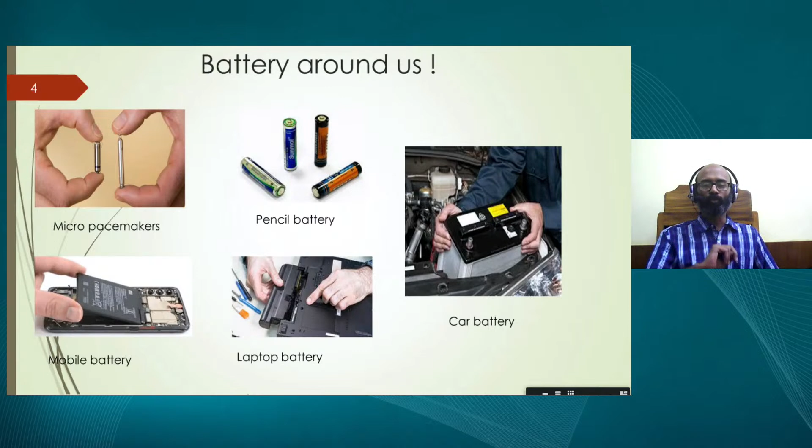So looking at these things, we can categorize batteries into two types: the primary battery and the secondary battery. The primary batteries are the ones which you use and then discard—lithium batteries, alkaline batteries, and zinc or carbon-zinc batteries are available.

Here, the user will charge it once, and then use it, and once it's over, you just throw it away. Whereas when you go to secondary batteries, there you charge multiple times—you charge it, discharge it, charge it, discharge it—you can do it multiple times.

But is the concept different for any of these batteries? No, the concept is always going to be the same. The chemical energy gets converted to electrical energy, and then you use the electrical energy and throw it away in the case of a primary battery. In the case of a secondary battery, you have a chemistry such that you can charge it again, converting electricity to chemical energy, and then use that chemical energy for your purpose later as a discharge mechanism. So chemical energy and electrical energy—you are essentially playing with the battery chemistry. This is the concept of batteries.

I have written here redox. Since you are in class 9 and 10, you must already have started looking at what is oxidation and what is reduction—so those reactions are possible. A battery works on the principle of redox.

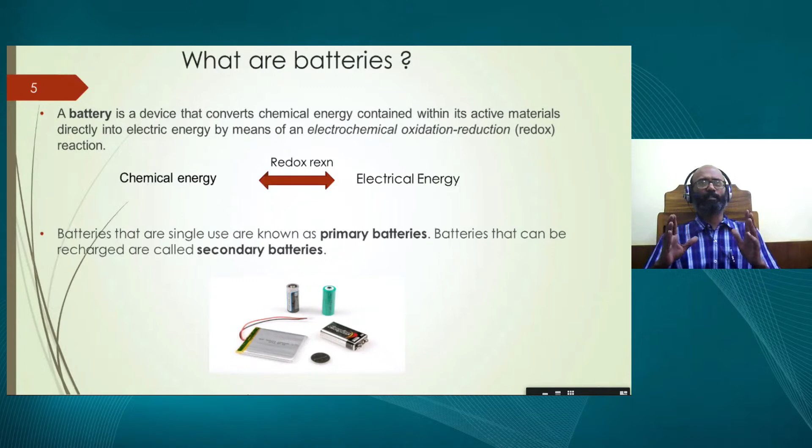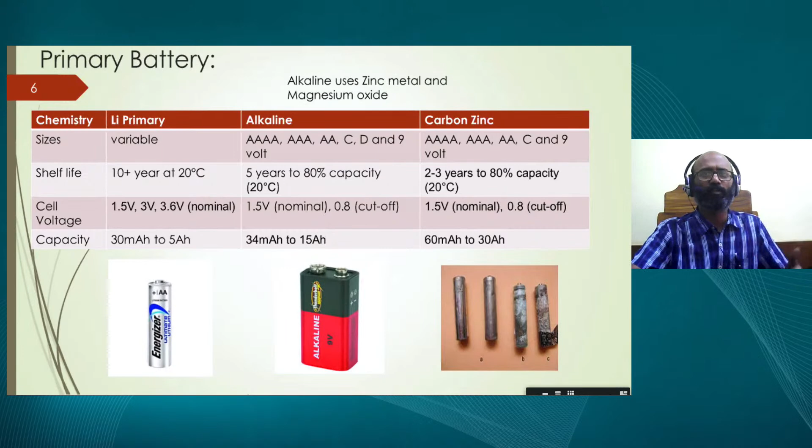Okay, so now I go for the secondary batteries. In the case of primary batteries, one of the important things to know is that the shelf life is relatively large, but the capacities are very low. They are not very high capacity batteries, so if you want an application, you need to put many of them together to use it. That's not very viable, so it is not good for many applications. So what you need to go for is the second type.

So the shelf life is not very much. As soon as you buy batteries, you have to put it there. At the same time, the life of the batteries is more, which means that shelf life and the normal life is different, because you can charge and discharge. How many times can you charge and discharge? You can discharge at least 3,000 times. This is the lithium-ion battery.

You have lead-acid batteries which are very much available in India. As you can see, some of your UPS and all those things are running based on that. Your car batteries are also lead-acid today. And the technology which is already in the market includes lithium-ion and polymer batteries, and lithium iron phosphate-based batteries. These batteries are already present.

There is something called 18650, I have written here. What it means is that this is the size of the battery, basically. A size like that, 18650, is the size of the battery, that's what we talk about. The prismatic batteries and other batteries look like that. You can see that, that's the kind of batteries.

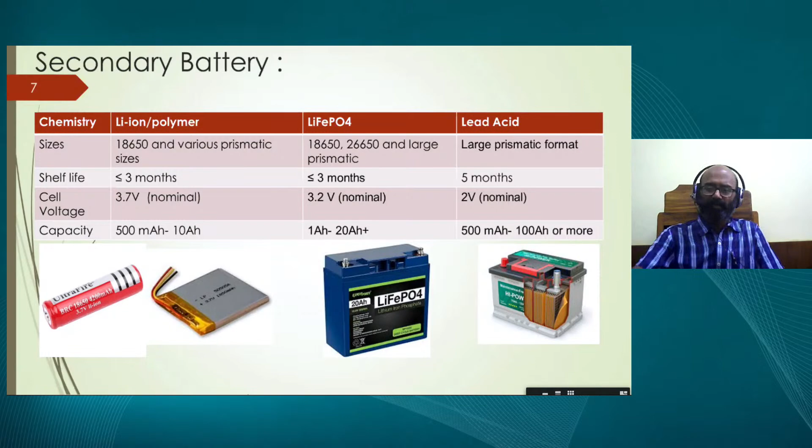So the prismatic battery, or then there is one more battery which is also possible, which looks like a prismatic battery. It is a pouch cell, we call it a pouch battery. And these are the three kinds of batteries which are in the market.

Let us see how to read these batteries. This is the first thing you need to know before we understand about the batteries. The first thing we always look for is, what is the capacity of the battery? Who decides the capacity? The capacity of the battery should be high, then I can use it now. So who decides the capacity? It is the chemistry which decides. Basically, it's the cathode which is there, that decides the capacity of the battery. If it is low, it is low; if high, it is high. So it is your best choice to choose the capacity of the battery.

But you can read it in terms of milliampere hour or what, that's up to you, it depends on the thing. Do you want to read it as a power, as the energy which you want? And the second thing is the maximum voltage. The maximum voltage is again decided by the cathode and the anode. So your chemistry is again going to decide the cathode, and the way you choose is going to decide your capacity.

And I'm putting it here, one of the Samsung and the Apple batteries. These are the places where they are given, you can read them. Before you buy batteries, you have to look at it. So higher the voltage, yes, it's good, higher the voltage is good. And the nominal voltage means the average charging time, the voltage that it's going to see. So that is about 3.85 for a 4.2 volt or 4.4 volt battery of lithium. So Samsung lithium battery is something which I'm trying to show you.

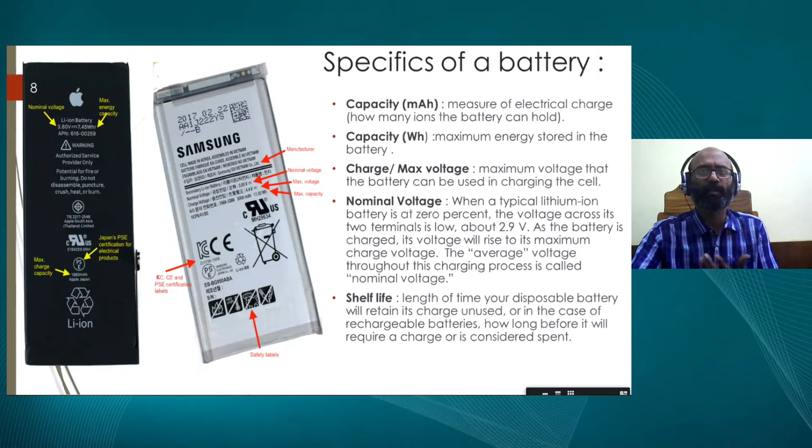There's something more also, there is something called SOC, they call it the state of charge. So state of charge, when you go to a market, this is particularly important for the EVs. When you go for the EVs, this is important. I'll come to that point a little bit later, maybe, that's better. When I show EVs, I'll come to that.

Okay, this is how you read the batteries. Now I'll show you the analogy of the battery, the charging and the discharging.

What is it? Let us assume that you have a reservoir of water, which I'm showing on the left-hand side. There is an upper reservoir and a lower reservoir, and I'm opening the reservoir, and it is going to come down, and there is going to be a turbine which is going to rotate and generate the power. So that is discharging. I'm discharging the battery now, and then I'm taking the power and utilizing it. Okay, now water comes to the lower reservoir. So what I'm saying is, upper reservoir is the higher potential, lower reservoir is the lower potential. So now going from upper to lower potential, I have taken the charge. What is my charge? Here it is like water. I have taken my charge.

So I have drained the battery. Now I have to charge it. How do I charge it? I'm going to put a pump and put the water back into the reservoir. Okay, so this is the process of charge and discharge.

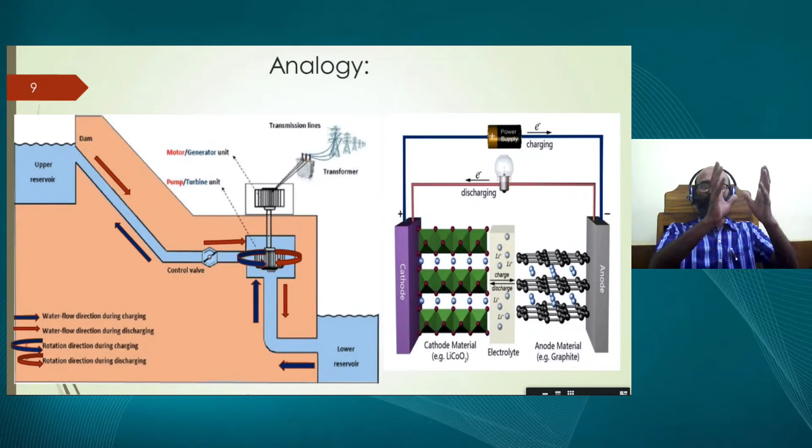That's exactly what you see on your right side. The cathode has got lots and lots of lithium reservoirs. So this lithium, I'm going to put a source, and I'm going to take it out and put it on the anode side. What is it I have at the anode? Possibly graphite, which is very cheap. So I'm going to put it over the graphite, and now I'm going to remove the connection.

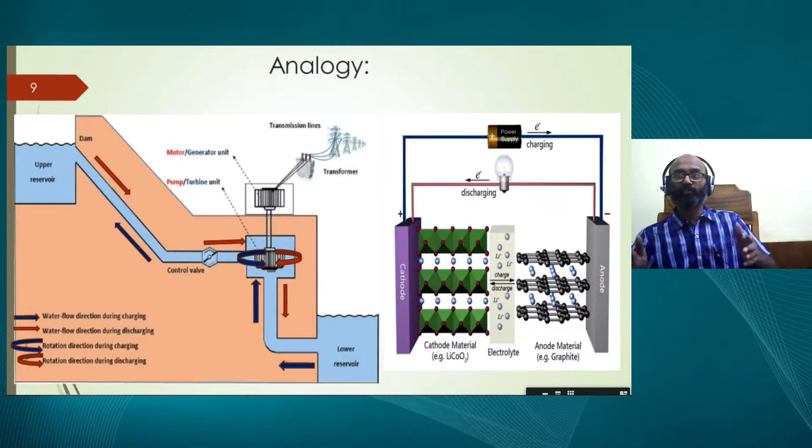Now charging is over. Now I'm going to discharge it. I'm going to plug into my application, and then it goes from anode to cathode. When it goes from anode to cathode, I'm using it, which means that now it is completely charged. Charge means I have higher potential. I put the charge there. Now I can discharge. So this is the very fundamental, and this is most important.

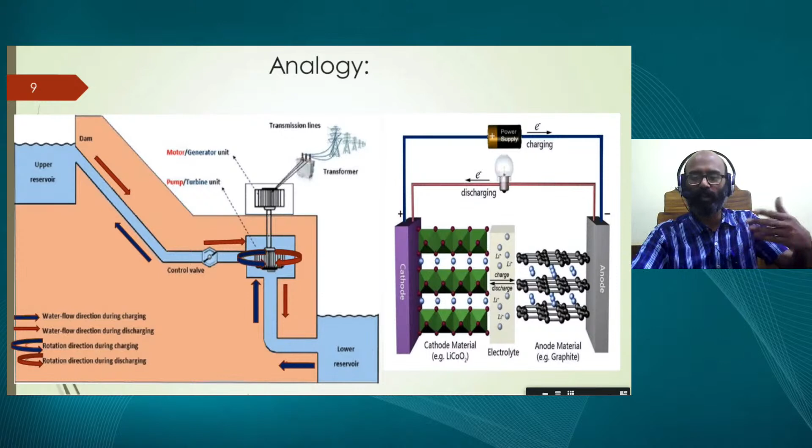Okay, so now, then all batteries should be same? No, no, no, all batteries cannot be same. What matters is the path.

So I have charged up to 5 volts and I am coming to 0 volts. Now the way it is coming down, as you can see in your Daniel cell, which you must have studied in your classes, where you have zinc anode and copper cathode, and you have something called a salt bridge. That is the path. If you don't have the salt bridge, then you cannot transport the ions. So the transport of ions is extremely important.

What ions are we talking about? If it's a lithium battery, I am talking about the lithium. If it is a zinc battery, I am talking about the zinc. If you look at the primary batteries, the lithium primary batteries and the zinc primary batteries, the same way, the principle is same. If it is a secondary battery, then 5 volts, the way it goes, it has to come back.

So your road should be as open as possible. You should not have too much of crowd there. So which means that as I have drawn the resistance here, your internal resistance of the battery should be as minimum as possible. Okay, this is extremely important.

So the whole of battery engineering, your cathode and anode will not change, my boys and girls. What changes is your road. How beautifully you put your road is what is going to decide your battery. This is where the technology is going to come in. Technology 1, technology 2, technology 3, which I am going to show you. This is where the research is.

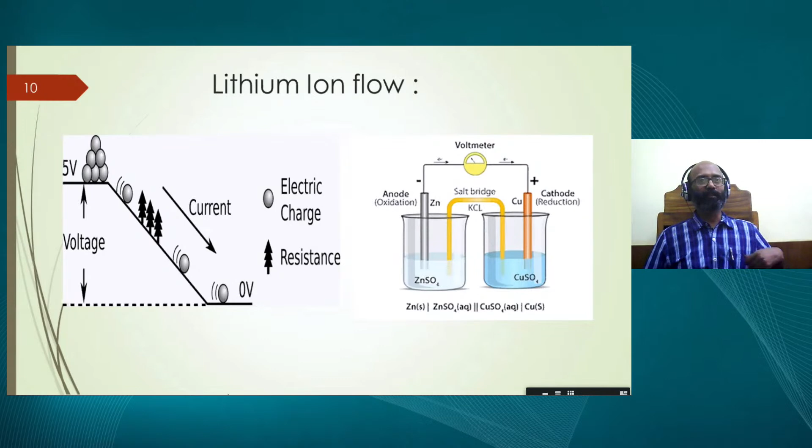We people, like in IITs, we work on these things. Of course, I can also work on new cathodes and new anodes. That's one part. But when I have so many anodes and so many cathodes, let me pick one of each. Now let me work on this road, the ion transport road, very well, and I can use it. So for that, you need to know what are the components of the battery very clearly.

Now I'll put it down like that - cathode, anode, and separator are there. Now I'm going to put it like that, and pour the liquid. What is the liquid? This is the electrolyte liquid. Then I'm going to seal it. Now your battery is ready.

Without that liquid, the transport is not easy, because in liquids, the electrolyte resistance is very low, and that's the reason we need it. I hope you understand this part. These are the very fundamentals of the battery. These first few slides are all about the very fundamentals of the battery.

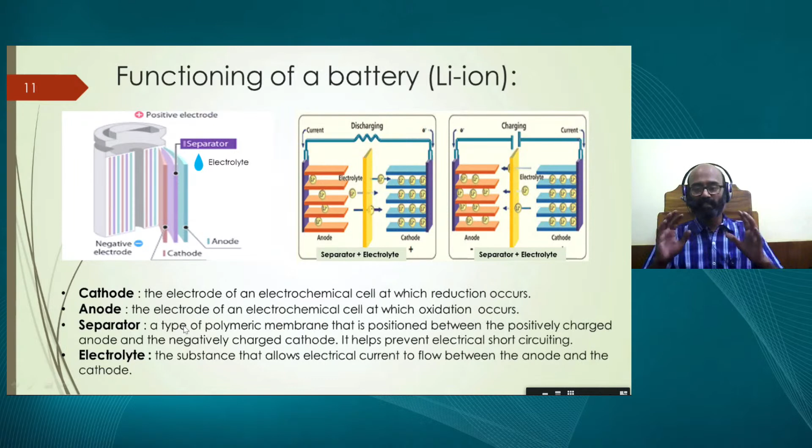So cathode and anode together decide your total voltage of the battery, and the separator and electrolyte together decide how quickly or slowly you can charge or discharge - fast charging, fast discharging - and second, the internal resistance of the battery and the life of the battery is going to be decided by these things. This is a very fundamental part of that.

Let us look at one of the chemistries - the lithium-ion battery, lead acid battery. The chemistry looks more or less the same. You have the redox reaction happening, and what is happening at the cathode is that you are going to take the lithium out from the cobalt oxide. So lithium cobalt oxide, you are going to remove it, and then put it there.

You are going to apply a potential, and then at the anode, you have already put the lithiums in carbon, like it sits as LiC6, and when you discharge it, that lithium is going to go and reach the cathode side. This is the chemistry, both in the case of lead acid battery or the lithium-ion battery, it's the same thing.

In the lead acid battery, it is lead metal versus lead oxide as the positive electrode, which we tend to use. In the case of lithium battery, it is lithium cobalt oxide, and the carbon is what we cycle between. So this chemistry remains more or less the same.

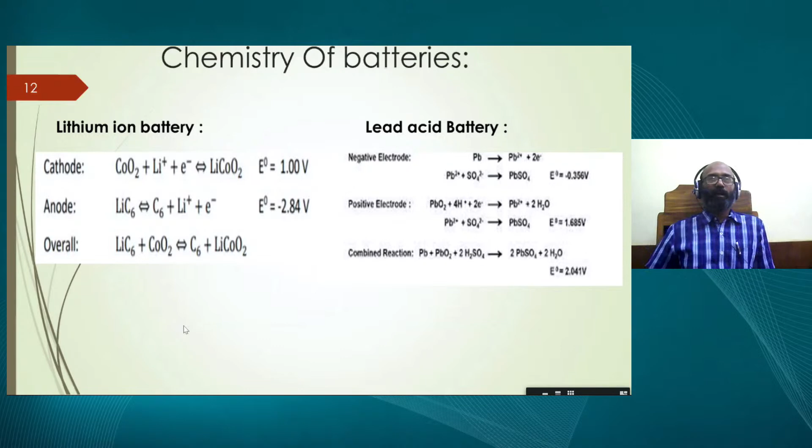However, as you can see, the voltages are different. These voltages are the electrochemical potentials, and I am going to show you this. If you open your NCERT books, you have a big table which I am going to show you somewhere down - you already have this in your class textbook.

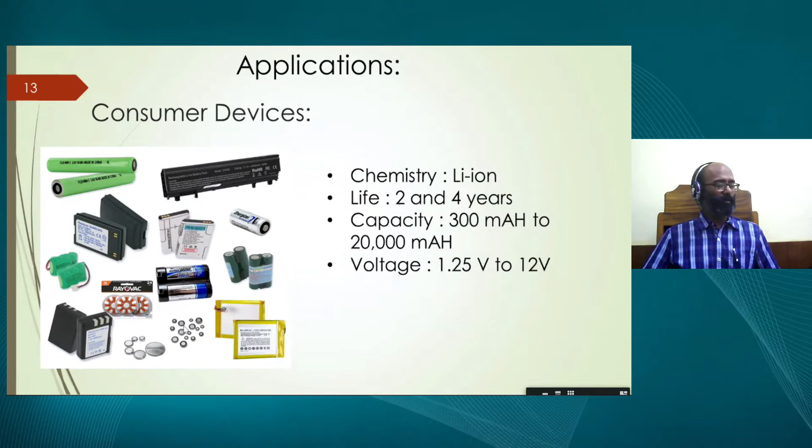So now look at the applications - what are the various possible applications? You have consumer devices like lithium batteries for laptops or remote controllers, or for stationary applications, and particularly very small applications like your watches. For all these purposes, these batteries require about 2 to 4 years, which is good enough, and the capacity is about 300 milliampere hour to 20,000 milliampere hour. These are the kind of batteries people look for in consumer devices. The voltage ranges from 1.25 to 12 volts - for lead acid batteries, 12 volts is very common, people look for 12 volt batteries.

Next application is the grid. What is this grid application? Grid basically means you have a thermal station, and you have huge power at the grid. So what happens is you are actually trying to draw power from the grid, as there is a lot of power there, and you're going to draw from it.

So now what is happening is that many batteries are put up, so as not to pressurize the grid, because there is a peak hour and non-peak hour. In peak hour, the power you draw is more, and in normal times it will not be much, so you have to have a balance. In order to protect all these things, we need to have batteries - when we are not using it, you charge the batteries, and when you're using it, the batteries are ready to give you the power.

This is another very important application which is going to be very large, and sodium sulfur batteries have been using it. Now people are thinking of using lithium ions too. Here you are not talking about 1 or 2 years. Once you fix it, you go for 15 years, and the capacity is not like milliampere hour, it is in megawatt, gigawatt. It's a huge capacity.

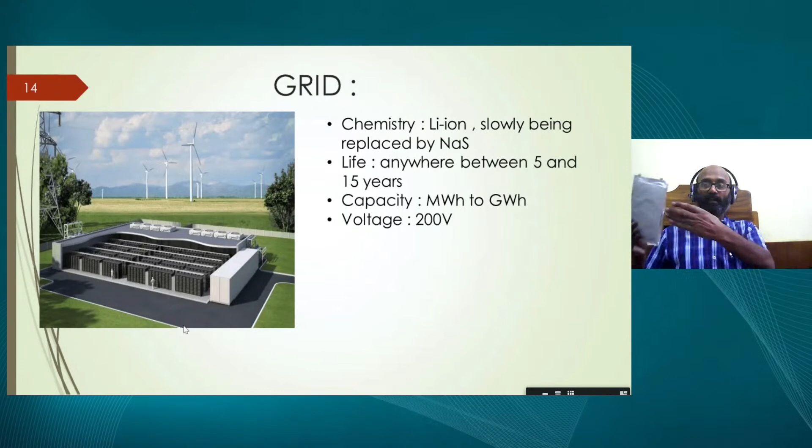The battery remains the same, it will be the same battery like this, but I'm going to put many of them. So it will be a very large area where we are going to put these batteries. And the voltage also, you see the 200 volts. Even a single battery, not this size, rather of this thick size, you'll be able to make.

Next application is going to be UPS. UPS is, you see your PCs require UPS, and many of your some very sensitive applications which you do, you better have a backup. So for that you use the UPS, and here you go up to 48 volts, and the battery life will not be very large, but the capacities of the order of 6,000 ampere hour can be used. But for these batteries, you don't need very high-fi ones.

Even 50% DOD, this is the depth of discharge, can also be used. And the state of charge and depth of discharge I am going to explain to you.

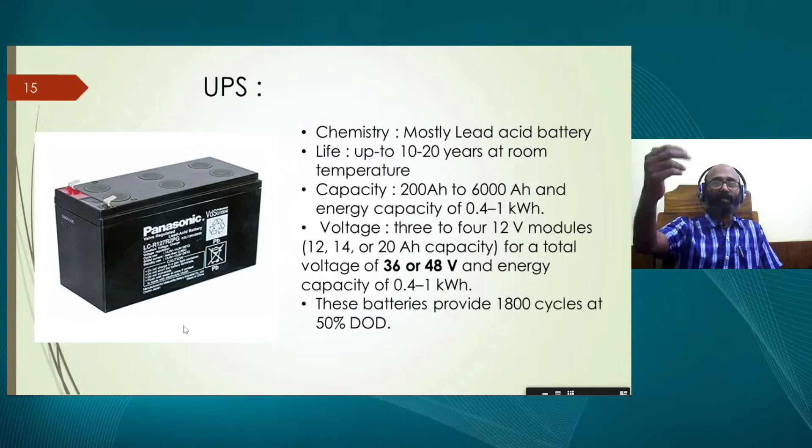The other application is going to be your electric vehicle applications. In electric applications, definitely you can still use your lead acid batteries, but with some modifications. But still, the capacity of those batteries is going to be very low. That's the reason energy density of lithium-ion batteries today, nobody can beat them. So lithium-ion and lithium polymer batteries are the best batteries available in the market today. People go to China and get them, and they make it and sell it. That's what is happening today.

So the capacities, if you look at it for electric batteries, what you have is 40 to 100 kilowatt hour is the kind of batteries required for that. Even 150 is possible, but it depends on the kind of car you use. And the voltages used are about 100 to 200 volts.

At the same time, your DOD is different here. The state of charge is basically the charge which you have after whatever the life of the battery is, the charge which is there for you to utilize, which is kind of like surge, you can say. The energy available for you to utilize. But you look at it, for the electric vehicle, we are putting it at 80%, whereas for the UPS, we are putting only 50%, because for electric vehicles, the energy hunger is very large. That's the reason you need to have a lot of energy for this one.

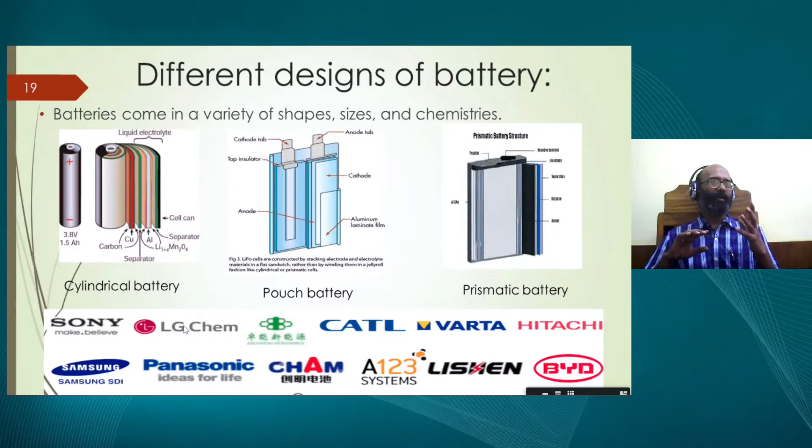Now let me tell you about different designs of batteries, because designs of batteries are also very important. For a car battery, you generally do not go for cylindrical batteries. Of course, Tesla in one of their models is going for cylindrical batteries because they are small, easy to manufacture and easy to put in. There are some advantages involved in that.

But generally, we go for the prismatic batteries or the pouch batteries. The prismatic and the pouch look like this. The only thing is the way you wind these batteries is going to be different. In the case of a pouch cell, you do a Z stacking, like that you put it. Whereas in the case of prismatic batteries, you wind it - very simple winding you do. Whereas the 18650 batteries, they look like that, as I'll show.

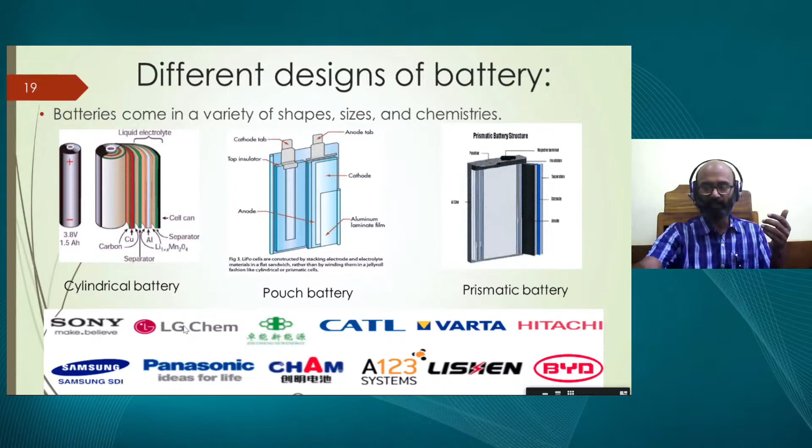So you can look at the number of companies which are making these. You can see that all these companies are from outside India - none of the Indian companies are actually manufacturing batteries. I am going to come to that point a little later. So you look at the Indian battery manufacturers - most of them are lead acid batteries, and then zinc carbon batteries, and nickel cadmium batteries. Most of them are primary batteries, and a few of them are secondary batteries. Nickel cadmium - some of them are secondary batteries being manufactured in India. But lithium-ion batteries are not yet being manufactured.

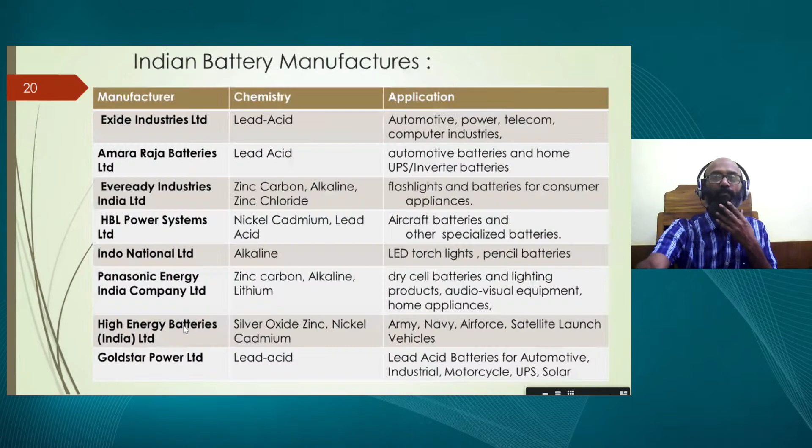Next, look at the cell. Why? Now the question comes: why? What is the problem? Why can't we just do it? When we can do it with other batteries, why can't we do it for lithium? Look at the problems - here I'm going to explain the troubles involved in the process.

Let us look at the cell fabrication - manufacturing of this cell I'm talking about has three components. Component one: you should have your cathode and your anode, and that cathode and anode need to be prepared, coated in the form of a film. Then you should take it to the formation of the cell, and then you have to go for testing. There are three parts you have to finish, and then the batteries which are very good will go off. If they're not good, they'll come back, and again you need to relook into the design part. So this is the three key components: cathode and anode preparation, formation, and testing.

In cathode and anode preparation itself, there are about 5 to 6 steps involved. And again, the formation - like the stacking, packing, and filling the electrolyte - that is another 5 steps. Similarly, testing is another 5 to 10 steps. So all put together, there will be so many steps involved. For example, if you look at the lead acid battery, the steps are more or less the same.

Like pure lead you take it, and the lead oxide you take it, and grid casting you do it, and you need to paste them, and plate stacking you do it, and you can cut it. The cutting is done to the size required for the application. Then formation, where you actually put it. So this is the way you go: formation, cutting, plate stacking, group welding, connector welding, acid filling, and then charging and discharging is done. So this is the kind of scenario for lead acid batteries.

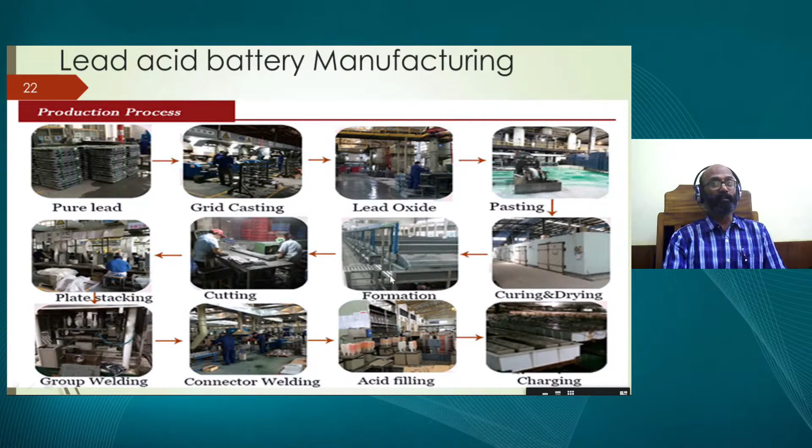But however, if you go for lithium-ion batteries, you see the complication is going to go up. I'm going to show you. It involves about 16 to 22 steps or even more.

So you have the mixing. First, you need to take it and mix the powders very well, and then you need to coat the powders, and then calendering. Calendering means you need to press them, and then you need to slit them, groove them, dry them, fill them, and weld them. Then diffusion, crimping, tester, sorter, and everything. Most of the things have to be done in the glove box. That's another very, very important thing.

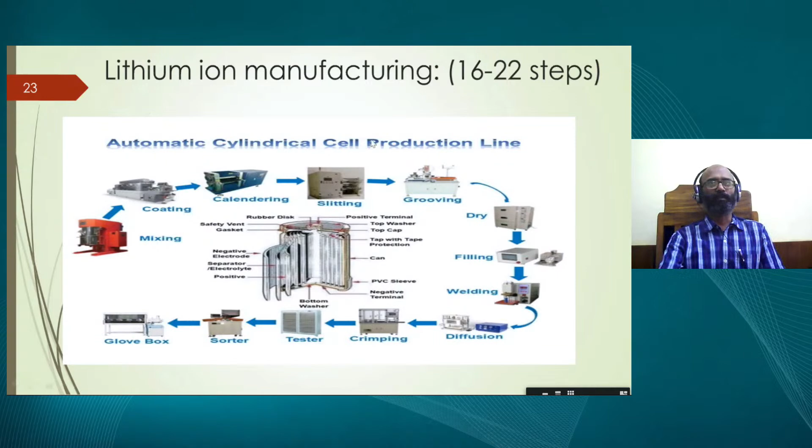So what I mean to say is about the process and the cost. I have written so much process here. You see that from receiving the electrolyte, material preparation, to casting, coating, solvent evaporation, and solvent recovery—though the solvent recovery part we can forget for the time being because some of these days we are doing it with water—and you can go with electrode slitting. As you can see, I have drawn something with a pink color that I call a dry room. On the right side is the cost of using each of them.

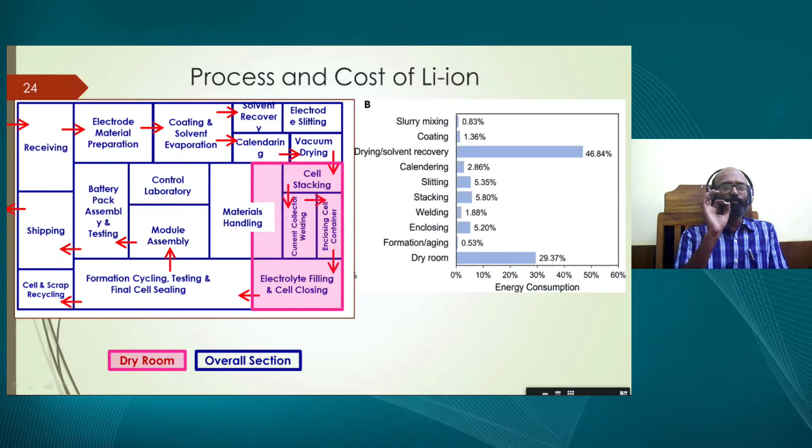The slurry mixing is not much. Coating is not much, about 1.36% of the energy consumption or the money. Calendering is also not much. But the major portion is taken by the dry room. Why? Because all these lithium-ion batteries, if you want to make them, you have to do it in an environment where there is absolutely no water or moisture present. That's the reason we call it a very, very dry room.

Without this, your batteries will not come up with good quality. They die very fast. If you make a battery in a dry room, it runs for 3,000 cycles. If you do it outside, 2-3 cycles are the maximum, maybe 5 cycles, it's done. That's the reason the dry room is extremely important, and it costs about 30% of the energy consumption, and the cost is also about 30 to 33% of the cost of making the batteries. So one has to be extremely careful.

This is the main drawback why many people in India are still not able to put this up. The cost is very high. To put one company, I need about 300 to 700 crores of rupees required to start a battery manufacturing company. However, at the same time, you can still go with electrode material manufacturing, separator manufacturing, and electrolyte manufacturing. These companies can come up in India very easily right now. But making the entire battery as a process, this dry room is the one which is very, very costly.

Because what you are trying to do is go to the dry room and fill the electrolyte. You see what I am doing in the dry room? We are trying to do electrolyte filling here. If this electrolyte is exposed to the air, that's all, it's gone. It's not going to work out. So utmost care should be taken.

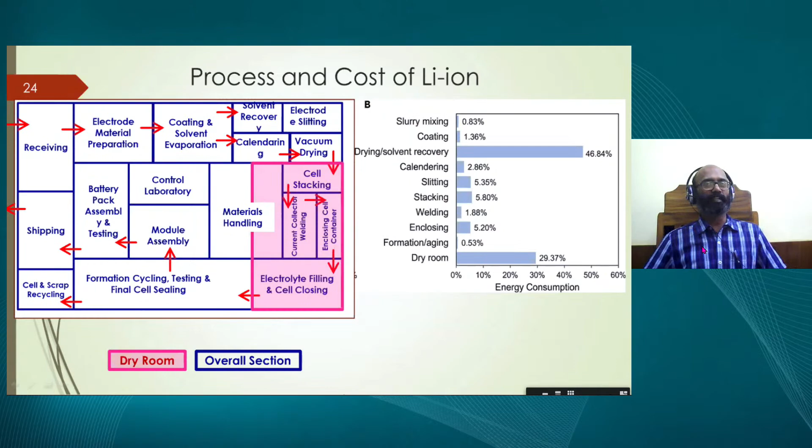Coming to this point, I forgot to tell you—the process should be environmentally friendly. For example, the drying and solvent recovery is 46.84%. Why is this 46.84%? Because we are using chemicals which are not environmentally friendly. These are very carcinogenic, and that's the reason it has to be completely dried up and taken out. So environmentally friendly means the batteries and materials we use should be very, very important.

So in order to get rid of these things, and to go for safer batteries, we will first see what makes them unsafe, step by step.

The handling of batteries is very important. You cannot abuse the batteries. You cannot throw them wherever you want, you cannot throw them in water, or play with them and break them like this. You cannot do this with a battery.

These batteries need to be handled very carefully. You are in class 8, 9, and 10 now, so you guys should teach your younger boys and girls that batteries should be handled very carefully—otherwise they will go off like a blast. Boom, they go like a blast. So don't play with this. It's very, very dangerous, particularly these lithium-ion batteries with certain technology, which are very, very dangerous.

Also, you cannot charge and discharge very fast. You put it for charging while at the same time trying to discharge it very quickly by playing a game—no, don't do that. These are all not very good. So over-discharge, fast charging, or over-discharge itself is a problem.

Over-discharge means you are completely draining the battery while at the same time trying to charge it—it's not good. Over-voltage, you cannot do it. Over-charge, you cannot do it. Over-current, you cannot do it. External short circuit, you cannot do it. What it means is you have a cathode and anode—you cannot short circuit them just like that. You cannot do that, okay.

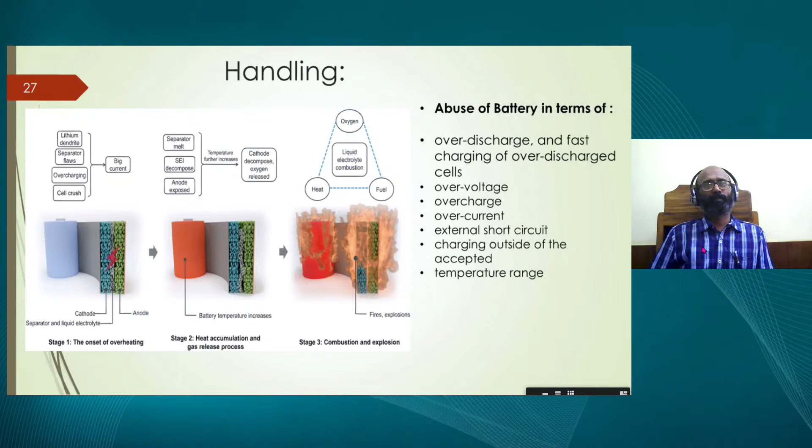At certain temperatures, you cannot use the battery. For example, you cannot take it to a place like Ramagundam and just use it, because temperature is very high in summer. Think of India—on one side you have Ladakh, which is at minus 15 or minus 20 degrees centigrade, while on the south, in Ramagundam, it's about 50 degrees centigrade. So can I use the same battery in Ladakh as well as in Ramagundam? My battery should be able to take that. These are the challenges of making the battery.

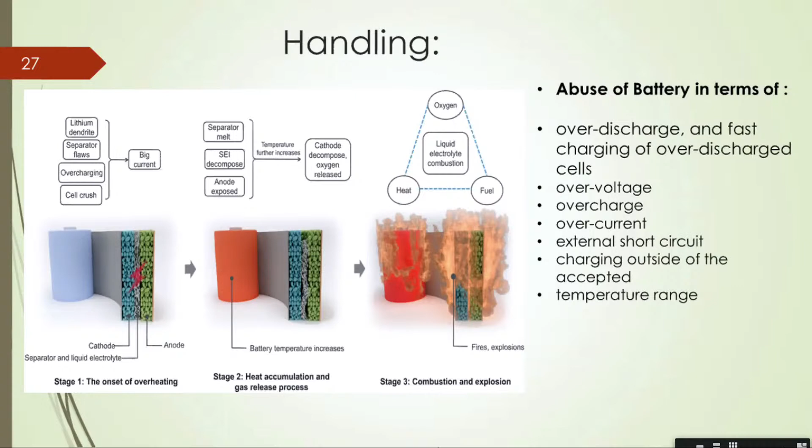So how is it going to catch fire? Let me tell you—internal short circuit is the way. What causes it is deformation, due to mechanical abuse, electrical abuse, or thermal abuse—I won't get into too much scientific detail. Any of these will create a problem in the separator. As I told you, cathode and anode are not the main thing—it's the separator and electrolyte that are the ones which cause the explosion. Your cathode and anode are not going to catch fire, no. But your electrolyte, yes, it can catch fire, and the separator you use can also catch fire.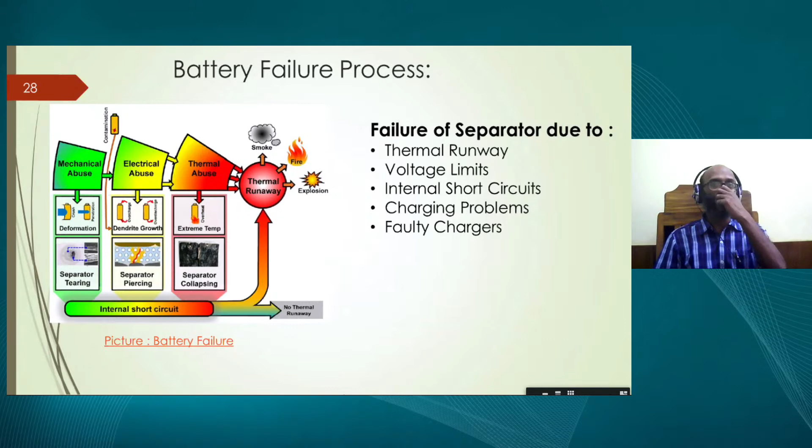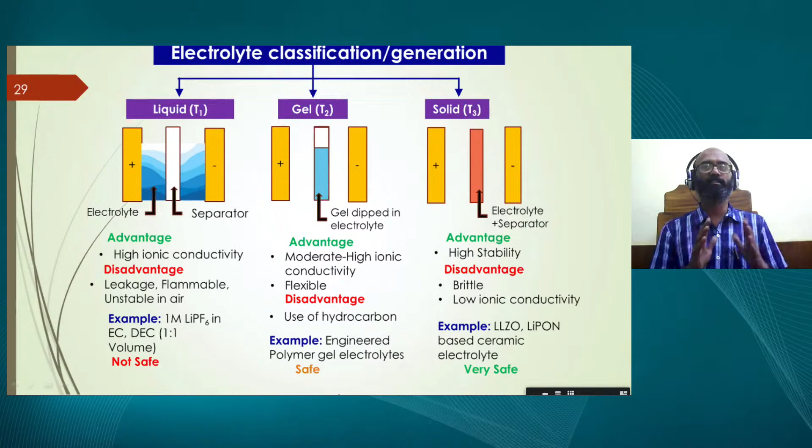Making these, some of them are going to be environmentally friendly. And when these batteries come up, this is going to be really, really good - eco-friendly, as well as large capacities you will have. But there are some issues, internal resistance, and those things need to be worked out a bit more carefully. So now the third point which I am going to talk to you about for another 5-6 minutes, or another 10 minutes, I hope I have time.

I'm going to put my time on - can lithium supply for the whole world? I talked to you so far that nobody can beat lithium. I've been telling you like that. Can lithium supply for the whole world? The answer is no. The reason is that lithium is not available everywhere.

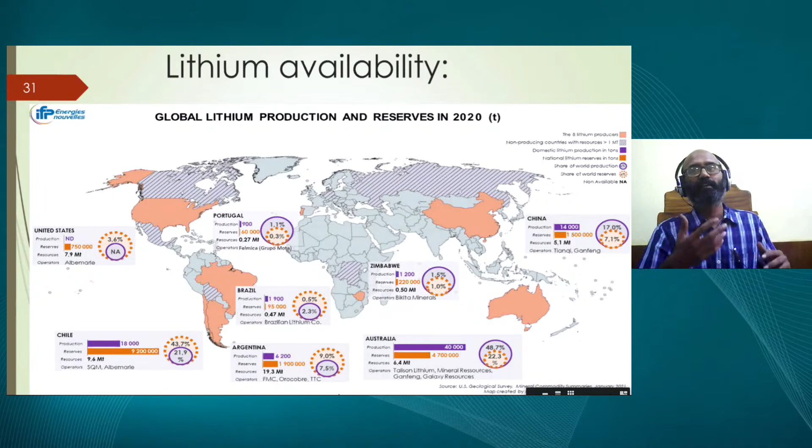So what I'm trying to tell you is that overall, if you look at it, lithium is not available everywhere at the same time. This is only the reserves. You have to take it out and put it in the form of lithium metal - you need to bring it up, or in the form of carbonate, you need to bring it up. You need to process that, and then use it. So the amount of lithium present there, even if you take the entire thing, it will not be enough for the entire world, because...

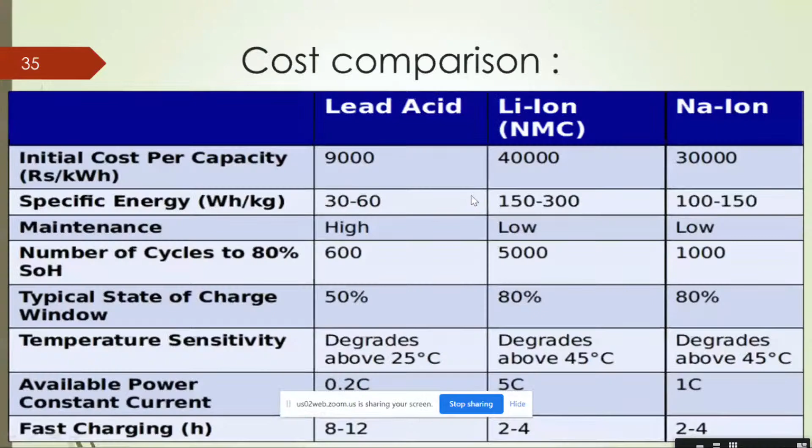So you can see it now? Yes, we can see it now. Okay, so this is the battery, and you look at the comparison of the lead and the lithium batteries. Still, the lithium batteries are very good. But if you look at in terms of cost, and in terms of the application where you can manufacture in India, possibly sodium comes better than lithium because we don't have any reserves. Comparison in the price also are given to you.

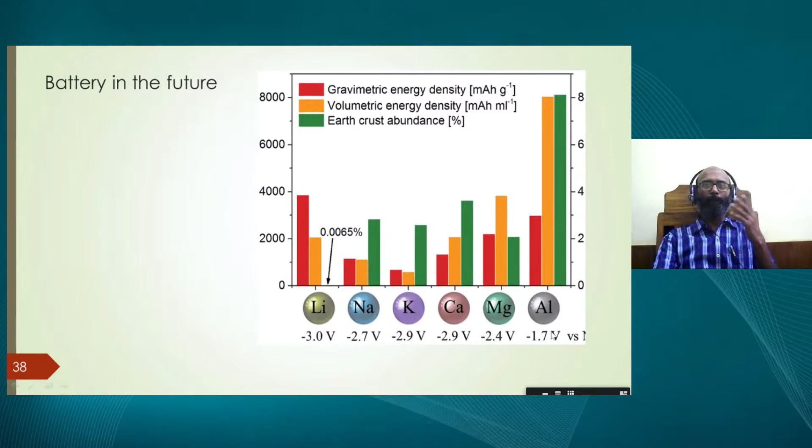You can see in your NCERT book, looking for the potential: one is sodium, lithium is here very close by, and the third is aluminum, which is very close here. These are the three technologies possible in India. Aluminum capacity is also high, but the voltage is slightly low, so voltage-wise, sodium is still the better option for the Indian market right now, as we can progress towards aluminum.

This is lithium versus aluminum, also given because some students may be interested in aluminum, since we have so many plants and reserves in India. Aluminum is very much available, and sodium is very much available. At IIT Kharagpur, our research mostly looks at sodium, manganese, and iron—what is available in India, with that we can make it.

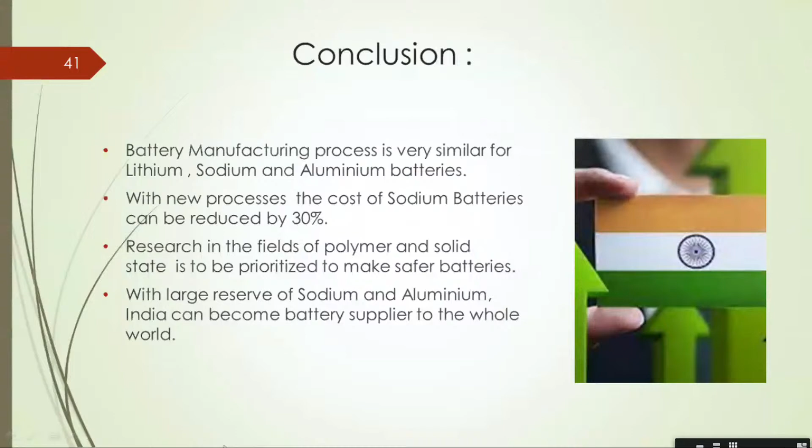So I'll conclude that sodium batteries can be made 30% cheaper, and the future will be aluminum. But research in the field mostly needs to focus on safety, and as I told you, we need to reduce two cost possibilities. The battery should be completely manufacturable at room temperature, without needing any dry room—if you have a dry room, the cost is going to be very high. So these are the sort of things.

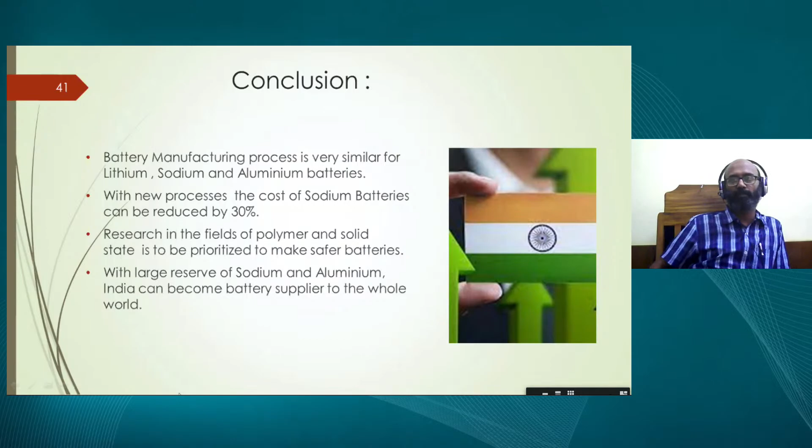Not only the material, even the process is also very important. I can take some questions maybe during the... yeah, sir, let me ask you a question here.

We all look forward to charging our batteries in a short span of time. So how can the charging time of the battery be reduced? Are there any limits to that? And also, it's being said that to charge batteries faster we apply higher voltage across the battery terminals. But is there any side effect to that? Can we say that this will reduce the life of the battery?

Basically, the entire battery uses the chemistry of the battery. First, it should allow you to do that. What I showed you previously is the road map, the road I showed you, like a road. That road should not have a lot of resistance. Then I will be able to charge and discharge very fast.

So now, charging and discharging, the cycling, the number of cycles is also going to affect the quality of the battery. Over a period of time, if you do fast charge and discharge for a very long time and the chemistry is not allowed for it, then your battery is definitely going to degrade very fast. But if the chemistry is allowed, meaning it is nicely optimized...

Your separator and electrolyte put together - this is not one aspect, let me tell you, there are about 50 variables in a battery to control. It's not an easy process. So in principle, yes, we can design a very good battery which is fast charging and fast discharging.